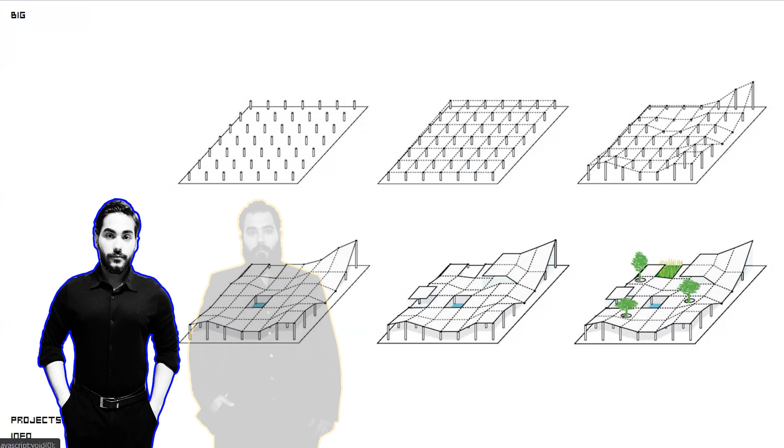Yeah, it's something that we learn about in school, something so simple. Something using a grid. Yeah, and being able to manipulate that grid is something he took into play, and then did kind of like a Yokohama Port Terminal-esque thing, and played with these floor surfaces that then turned into roof surfaces, and then go back into the floor and seating and so on and so forth. It's something we take for granted, that we don't really decide to touch on. But when you do it so gracefully like that, it's something to look at.

Yeah, I think it's very successful, and it kind of mimics water, right? Like the way that it undulates and looks kind of like a wave. It's a really good waterfront project in my opinion. And the fact that he has kind of a double layer system where he has different things happening with different levels. Maximizing on the efficiency of a single space.

Let's see, does it say when they completed it, or when he was working on it? Because I actually want to see if he was inspired by the Yokohama Port Terminal, because... No, I don't see it. Okay, well anyway, it looks very Yokohama. You know, even down to the way this system works.

Yeah, the materials and the system, you know what I mean? And the whole concept, down to the rails, those railings, and then that inner detail of the filling of the rail. It happens a lot, I'm sure, but it's just something to look at and be cognizant of, that a lot of your favorite architects use and borrow and are inspired by each other as well.

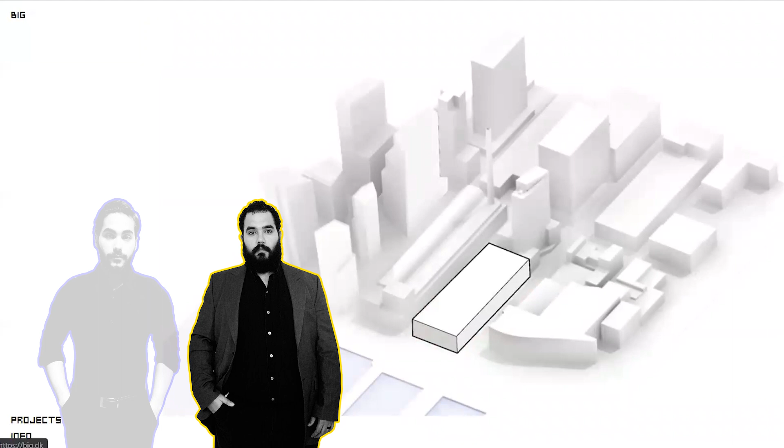This idea of stacking and creating a strange, non-traditional form, like you'd see in New York with a traditional high rise, and then being a little playful with the courtyard area, similar to what he did in other projects before. You cut that hole in the middle and create a giant atrium for everybody. Then by picking one of the sides, you're able to pitch it all the way up, which allows these units to have balconies and views down to the river and the spaces below.

Now here, I think he kind of walls off the city a little bit, where that peak is, on the opposite side. He tends to do that a lot, which I don't know if it's necessarily a bad thing if it's a pretty thing to look at, but when it doesn't blend too well in the context, maybe it could be a bad thing. Here I'm kind of neutral on it. He's pretty much opening only to the river and closing himself off to the whole city. If maybe he would have gotten this pitch and started angling down somewhere here, he could have projected to the city a little bit and also projected to the river.

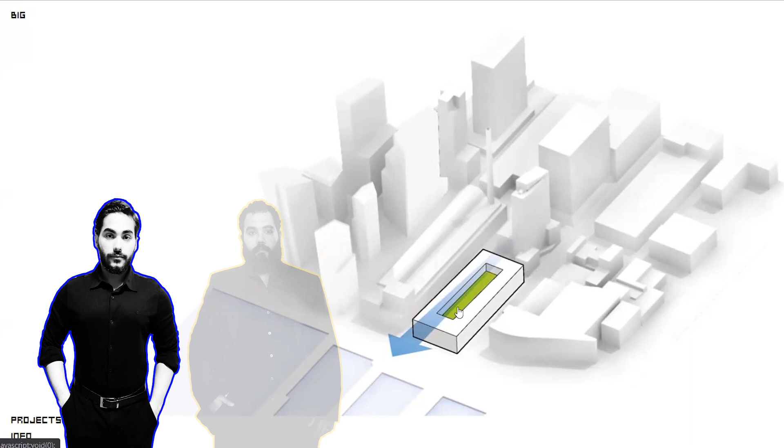But this is nice, right? Typically, when you have a space like this, developers tend to extrude this out, and then all the apartments have a balcony all around, and you have this communal walking area looking down at the atrium. Which is very typical. So the fact that he's done something like this, as simple of a move as it seems, it can be very provocative, and I think it definitely creates a statement. Like you said, you feel neutral about it. I feel neutral as well, because I don't really know what to pick.

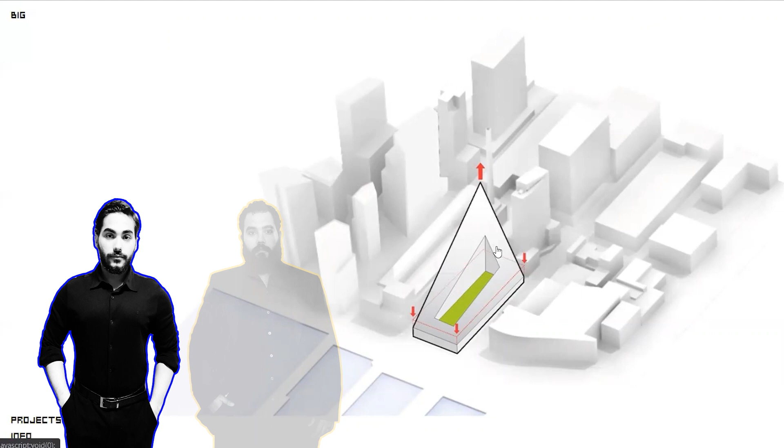If you read into it a little bit more, the river is known as this international zone, almost like a port would be in any other city. It's kind of like the trading area, the welcoming zone or coast for these cities. So I can kind of see why he would do it like that. That's thinking a little bit deeper into context, like you said earlier, and culture. What does that approach mean? That approach means something in the city and in the States, so it's something special that you need to take advantage of, which I think he did there.

And I guess the pitch profile, or the angle profile, is a lot more inviting than having a hard edge, as opposed to a typical building. And the interiors are nice too. They're warm and inviting, like most of his interiors. I've never seen a bland interior done by him or their group.

And the way that these two different profile edges create this framed view of the river, I think it's very nicely done. And even the park and the landscape, they could have just put something typical, but even there it's very organic, right? It strongly differentiates itself from the rigidity of the building, or other known parks in New York, like the High Line or even Central Park. Central Park has a little bit more of that feel, but not even that organic. I mean, it's a pretty winding set of pathways.

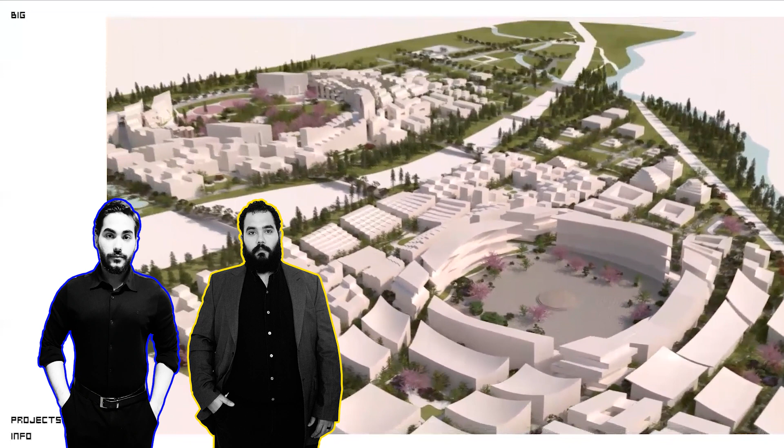Any other features? Layer systems, with a layering system of how people progress, how people drive and interact with the city. So it's his first take on typical massive urban development, city planning, which is very exciting to see.

Kind of wish you could lower the volume a bit.

As you can see, they're very simple geometries, but I think they're very effective in the way that they're laid out and space planned. Everything has a large natural light intake, very open.

If you look at it, the way he talks about it is this flexible network of streets broken down into various speeds. So you have one for walking speed, one for bicycle traffic, and one for automotive traffic, so that people are safe around these autonomous vehicles, which I'm sure will be very prevalent in the city. People don't have to worry about colliding or clashing with those things in a negative way. They can only be there to help.

And there's a couple other interesting things. That backdrop you see is Mount Fuji.

This is one of the things I love about his presentations and the way he designs. He's always paying attention and respect to whatever context he has. It's so easily done by utilizing a multiplicity of simple moves, which is what he typically does, right? He finds a problem and creates a very simple solution. Even if some other architects or people see it as boring or repetitive, I think it works.

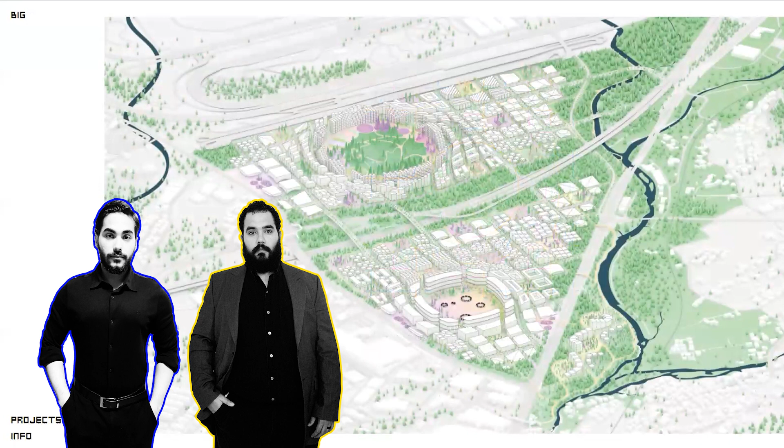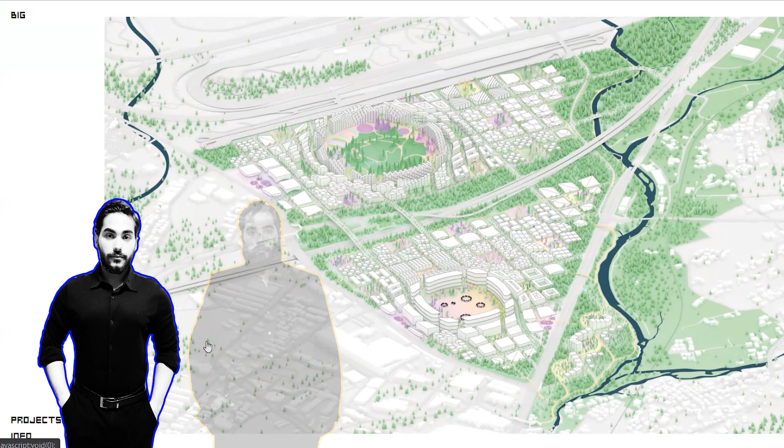So right here, this looks very different than his typical diagrams, right? I definitely see a strong Japanese influence. I was just going to say the way that this is showcased, I really like, and I really appreciate the fact that he's altering his presentation work and tailoring what he needs to show depending on his audience.

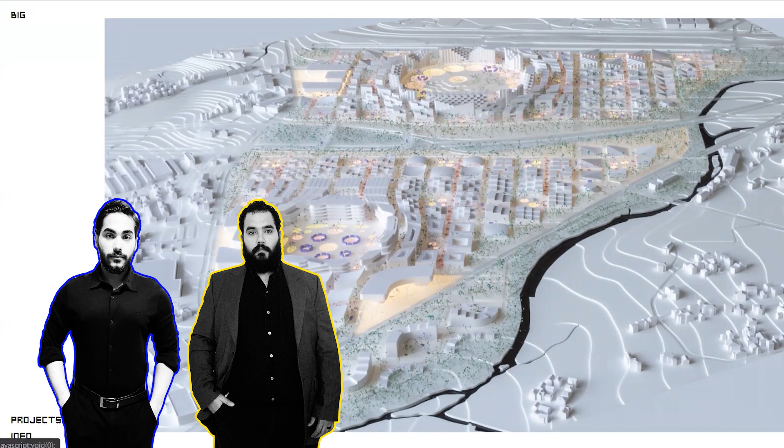Absolutely. It's strange, he gets a lot of flack for a lot of this stuff. But he pulls off so many things well. He's a great public speaker. And even if you don't like him or his style, you have to give him the props. Yeah, he's a salesman. You have to be like that.

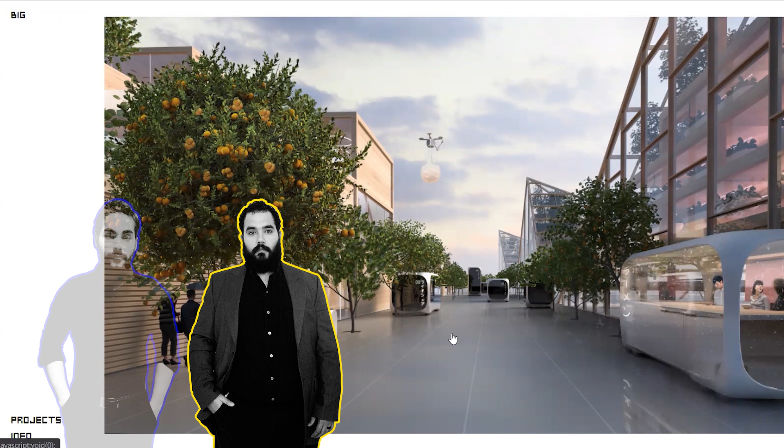So here you can see the autonomous vehicles, right? And they're not just cars, but they're like retail stores or capsules that are constantly moving, but they don't only serve the purpose of transportation, they also serve commercial ideals or retail. Like here we can see this looks like a retail establishment, a shop, right? That looks like a ramen shop. It's like a kiosk, but instead of the kiosk just being parked somewhere, it's constantly traveling.

It's constantly traveling, living, it's constantly breathing. I like that, so it's kind of like a breathing, living organism, right? It's no longer a city, but a new typology.

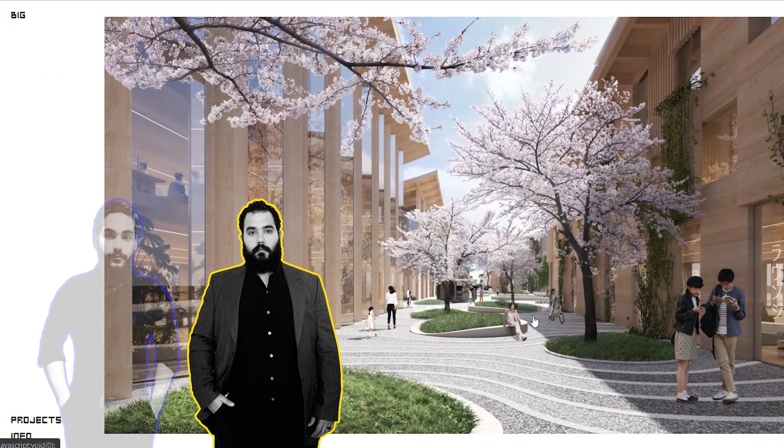Which I'm sure is something he definitely touched on. I don't know if you watched the keynote, but I know he mentioned something like that within it. When you watch it and see him go from above ground to underground, and how the underground is like if you were to take a watch apart, the gears in a watch, and being able to think of all these things at once is super interesting. Obviously he has other people, project managers and leaders working on these ideas too, but just the culmination of talent in that office is intense.

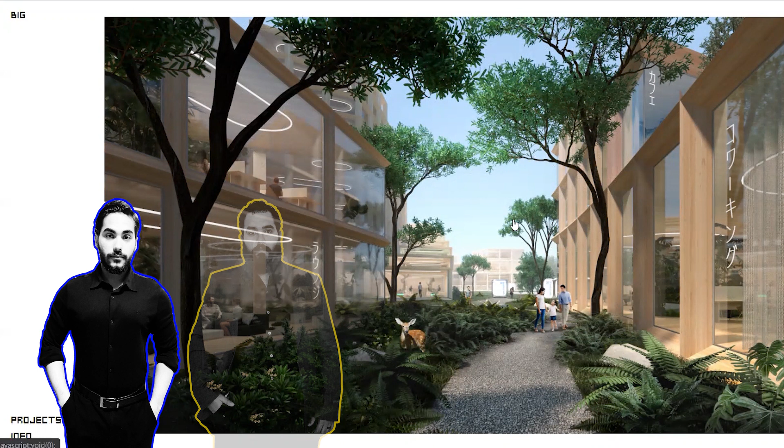And this right here, this is great. It's a nice shot, the way he's implementing landscape and natural elements throughout the city, and a detail like this. So the deer or reindeer, it's a very important animal in Japan. So the fact that he has something like this, a tiny detail that maybe not everyone knows, I think it's very powerful. It truly shows, it symbolizes, it truly shows that he actually did his research, that he's tailoring the project to the audience.

And here, this is that main public plaza.

I don't know, the use of technology, the Mount Fuji, this idea of being like a craftsman. Yeah, it's very technological, but at the same time it's very primitive. Yeah, right? I get what you're saying. It's a really good combination of the two, and I think it's very successfully done.

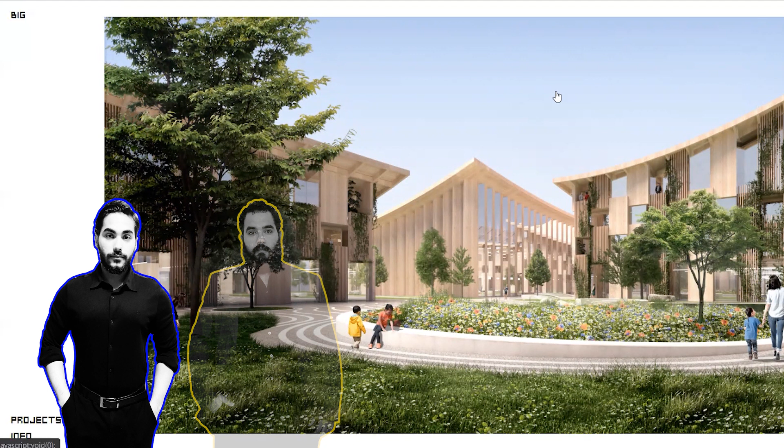Of classical Japanese architecture with, well not even just Japanese, classical architecture in general. The idea of the piazza and having a city in a grid that flows around it, it goes back centuries, it's architecture one-oh-one. And the fact that he's implementing that with new technologies like robotic arms, self-driving cars, autonomous kiosks that produce not only transportation for the general public living there, but also commercial and retail spaces.

This idea, like this workshop right here, kind of brings it all together. Like the point we were literally just talking about, you look at these traditional joints or connections, it's primitive, and then you see a robotic arm, and touchscreens, I'm guessing holograms. And with the guys in the Toyota jacket, the only thing he could have done was have the robotic arms building a Supra with an actual Toyota engine in it. I think that would have been dope.

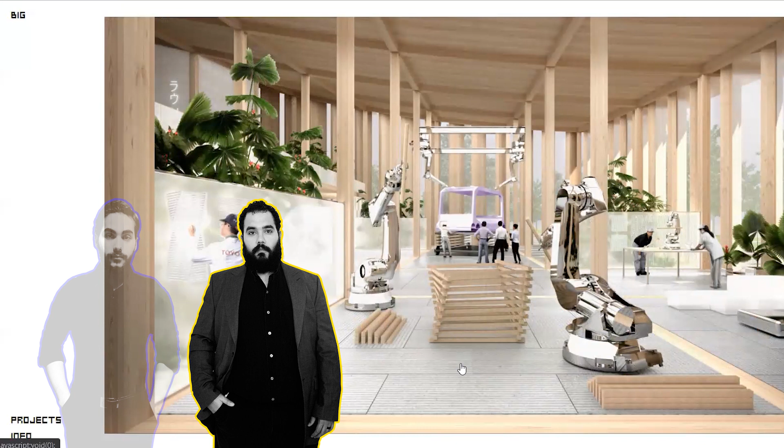Are you trying to say that German engines are not Japanese? They need to be in Japanese cars, of course. Of course, that's what I'm saying.

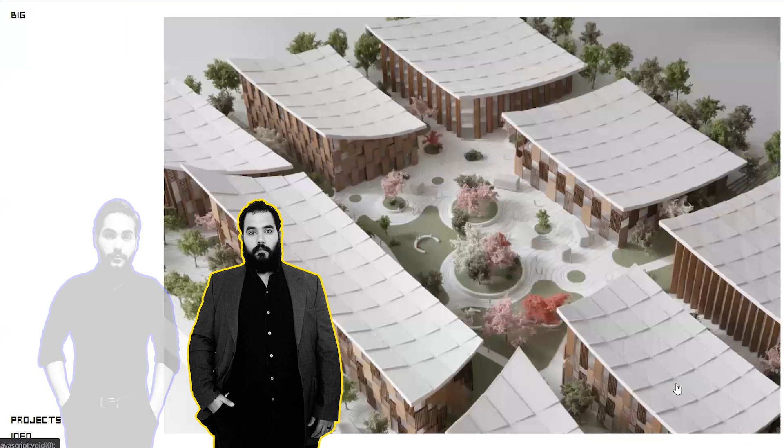So here we can see again that combination of primitive architecture with new technological advances. Or just classic details and small things mixed with really far-fetched, or what we thought was far-fetched technology only a few years back, just kind of coming into light and being like, hey, this is something that can happen and improve our lives. Which I think is awesome to see, architecture really getting in on the forefront of that. It's been doing it for some time, but for someone like him, a big time architect, to be going at this stuff, I think it's interesting.

Yeah, give him props, I think he's a great architect, and I think he's an even better public speaker. Yeah, he's a really good salesman. He's really good at selling an idea and at simplifying all the problems within a project, and giving an efficient and well thought out solution. Yeah, he's not lopsided, he doesn't just think of one entity of the project or one portion and say okay I'll solve this problem but half-ass the rest of it. It's all pretty well thought out.

He's very good at tailoring his presentation to non-architects, which is so important, right? Like architects, we can all read plans, we can all read sections, right? But the fact that he's able to dumb down an idea and simplify things for the general public that might not be invested in the field of architecture, I think that's a powerful thing that a lot of architects don't really think about.

I think we covered it. Yeah, I think Big, he has his core principles. He gets a lot of flack, you know, he's not even licensed, I don't even think we mentioned that earlier. He's not even licensed, and he went to school, then dropped out after a year, and that's when he decided to open up his company, where he started doing competitions. You guys can look for him and Big, the Bjarke Ingels Group.